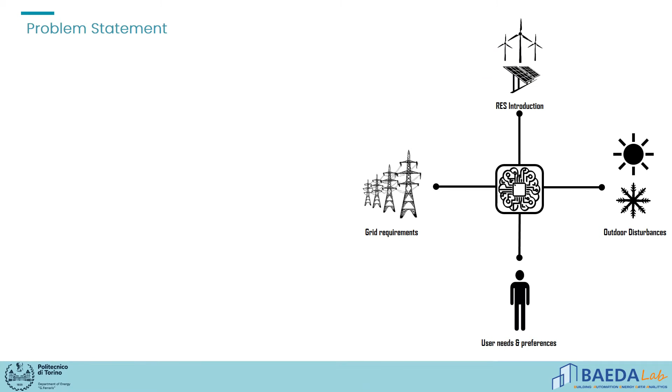Nowadays, buildings are becoming more and more complex due to the increased penetration of multi-source HVAC systems and the increase of distributed renewable sources and storage. This increases the energy flexibility, but at the same time requires innovative solutions for the optimal management of energy systems in buildings. Energy flexibility represents a fundamental characteristic of a smart building and defines its ability to adapt and respond to grid requirements, climatic conditions, and user needs.

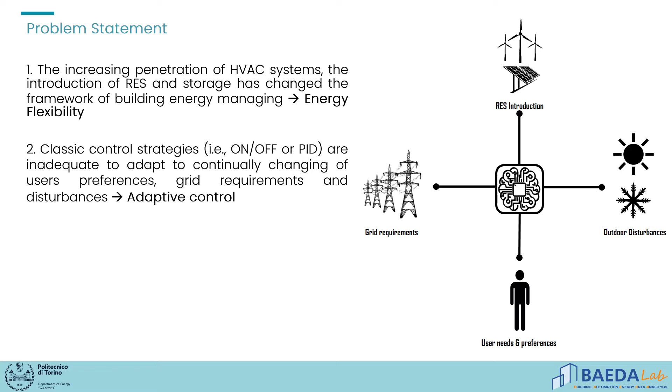Classic control strategies such as on-off and PID are mainly reactive and unable to predict changes in weather or building conditions, and their implementation results in suboptimal control policies. To overcome such limitation, the application of adaptive control strategies has been explored in the last few years. In particular, model-based control strategies, such as model predictive control, were explored to overcome such limitation, showing excellent ability in improving comfort conditions and energy efficiency in buildings. However, a significant problem in model predictive control is related to the performance dependency on the model definition for the control strategies optimization, which is often challenging to design with good accuracy.

As a result, the interest in model-free control strategies has increased since it does not require prior knowledge of the process or environment to be controlled.

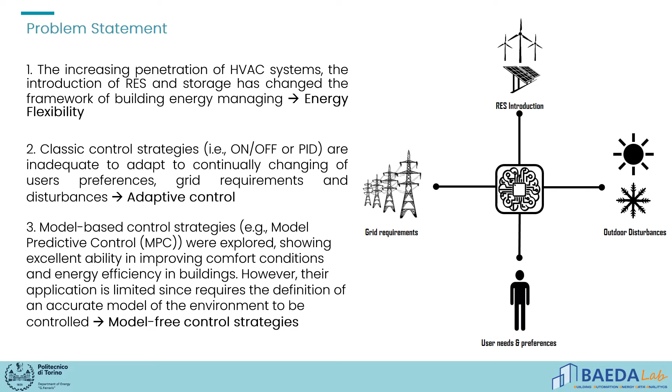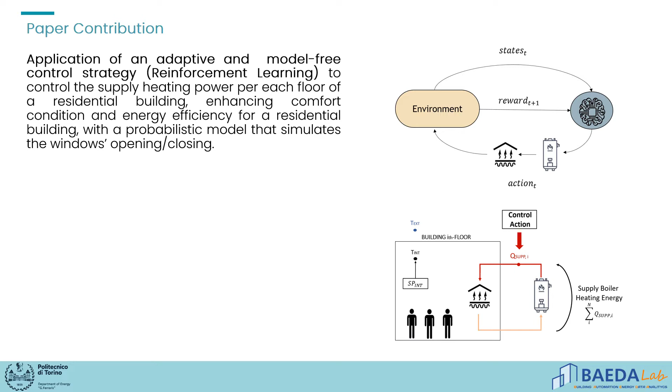Therefore, in this paper, an adaptive and model-free strategy based on deep reinforcement learning was designed to manage the supply heating power per each floor of a residential building for enhancing energy efficiency and indoor temperature conditions. The occupant building interaction was considered as part of the control problem using a probabilistic model which simulates the opening and closing of windows. Firstly, a sensitivity analysis is carried out on the hyperparameters of the model to assess their impact on the performance achieved by the control agent during the training phase.

Then, the best configuration is adopted for testing the adaptive skills of the controller by changing some forcing variables, consisting of 4 different control scenarios.

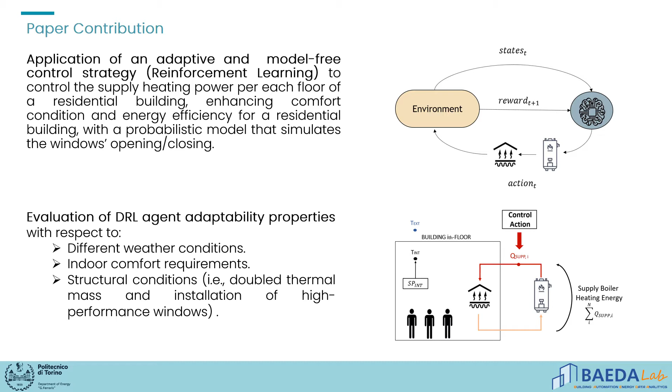Reinforcement learning is an area of machine learning, often using control theory, in which an agent learns an optimal control policy that maximizes an objective function through a trial and error interaction with the environment. The controller, called agent, is connected to an energy system and selects a particular action to maximize or minimize an objective function named the reward function. After performing some action, the environment provides the agent the corresponding reward and information about the new states, for example outdoor or indoor temperature. Then the agent analyzes the new information and provides new actions.

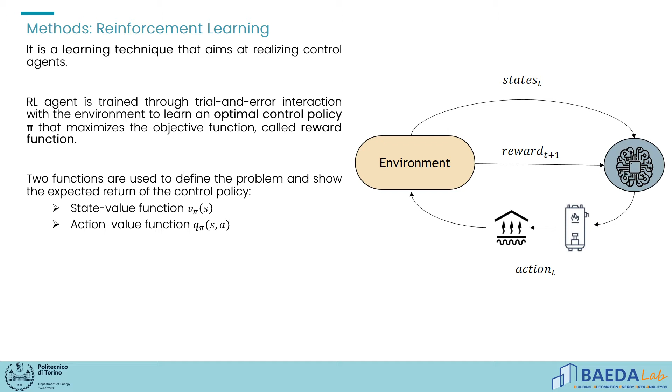Mathematically speaking, the problem can be defined by 2 functions, namely the state value and the action value function, that are used to quantify the goodness of a policy. The combination between deep neural network and reinforcement learning algorithm seems to overcome computational problems related to complex state space representation, leading to what is called deep reinforcement learning.

In particular, in this paper, it was implemented the soft actor critic, an off-policy algorithm capable of handling continuous action space. This method adopts an actor-critic architecture that employs 2 different deep neural networks, the actor and the critic, that approximate respectively the state value and action value function. Moreover, entropy regularization represents a key feature in soft actor critic, ensuring that the agent is pushed towards the exploration of new policy, while avoiding that it gets stuck in suboptimal behavior.

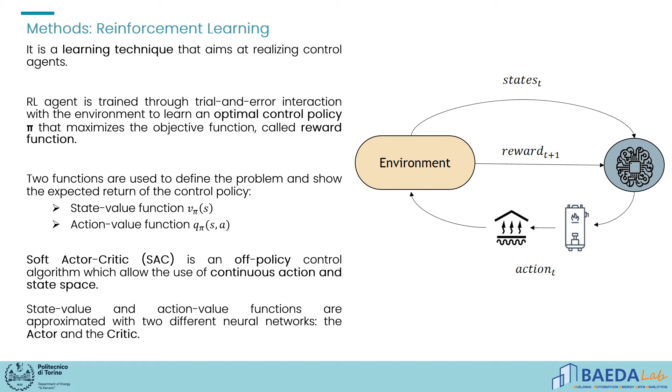The proposed control strategy was developed for a 5-story residential building located in Turin. The building is organized into 5 different thermal zones, 1 per each floor. The thermal zones are served by a radiant floor heating system equipped with a natural gas-fired boiler and variable speed circulation pump.

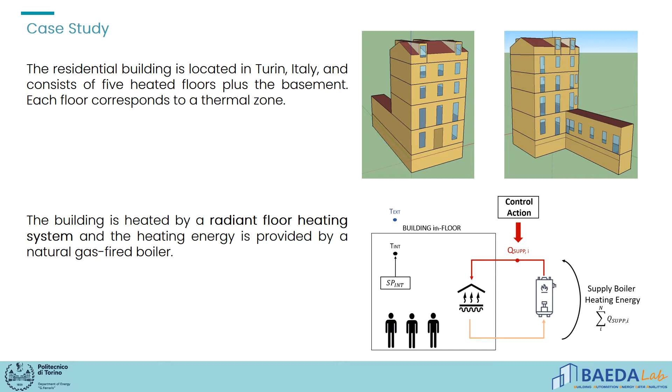4 different probabilistic models that simulate the occupant interaction with the building concerning the window opening or closing were implemented and tested within the simulation environment. These models are based on logistic regression and propose 2 equations to predict respectively the window opening or closing.

After a qualitative analysis, the model proposed by Anderson was implemented in this case study, and this model employs indoor temperature, relative humidity, and carbon dioxide concentration, along with outdoor air temperature, wind speed, and solar radiation, to estimate the probability of opening and closing of windows in the building, and the coefficient of logistic regression depends on the day of the week and the time of the day.

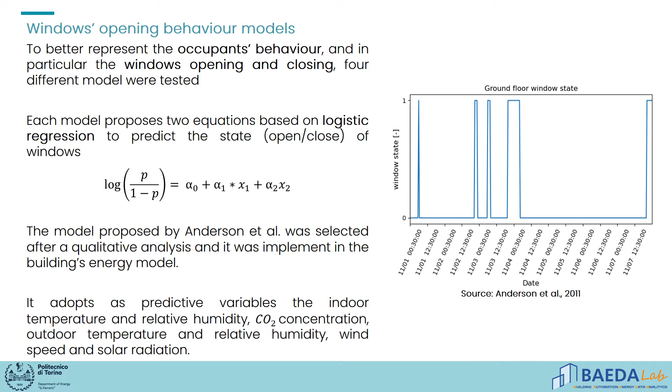Here is presented the methodological framework with the aim of introducing each stage of deep reinforcement learning controller development. The interaction between the controller and building energy model was simulated through building control virtual testbed, allowing information exchange between the building model developed in EnergyPlus and the reinforcement learning controller developed in Python.

The first stage of the framework was aimed at defining the main components of the reinforcement learning control problem. The action space includes all the possible control actions that can be taken by the controller. The reward is a function which describes the performance of the control agent with respect to the control objective. Finally, the state space is a set of variables related to the controlled environment which are fed to the agent in order to learn the optimal control policy which maximizes the reward function.

In the second stage of the process, the deep reinforcement learning agent was trained. Reinforcement learning agents are characterized by many hyperparameters which require appropriate tuning. Therefore, in this stage, a sensitivity analysis was carried out on some of the most important hyperparameters by training the agent with different configurations, in order to analyze the variation in the results obtained and identify the best solution with respect to the metric adopted.

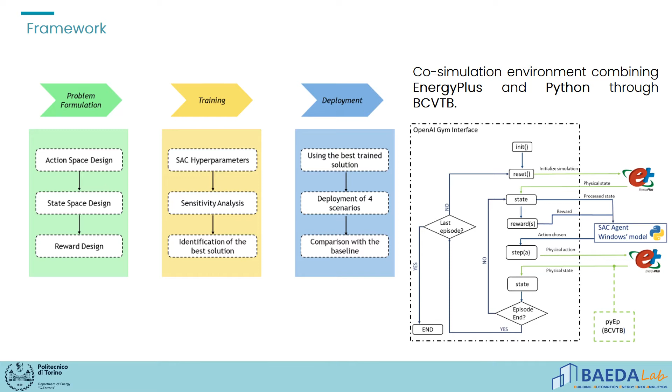In conclusion, the best trained agent was tested during the deployment phase in one episode which includes a different period from the training episode. Moreover, the deployment was performed in different scenarios, including different indoor temperature requirements and building envelope properties from the training stage, comparing the performance of baseline and reinforcement learning-based agents.

The performance of the deep reinforcement learning controller was evaluated against a baseline controller consisting of a combination of rule-based and climatic-based logics for the control of the supply heating power. The rule-based controller managed the operation of the radiant heating system according to the indoor temperature values and the occupancy schedule, separately per each floor.

The heating energy to each floor is applied 2 hours before the arrival of the occupants, or when the indoor temperature is lower than the lower threshold of the stability range during the occupancy period. Contrarily, during the unoccupied hours, or when the indoor temperature is higher than the upper threshold of the stability range during the occupancy period, the heating energy is not supplied.

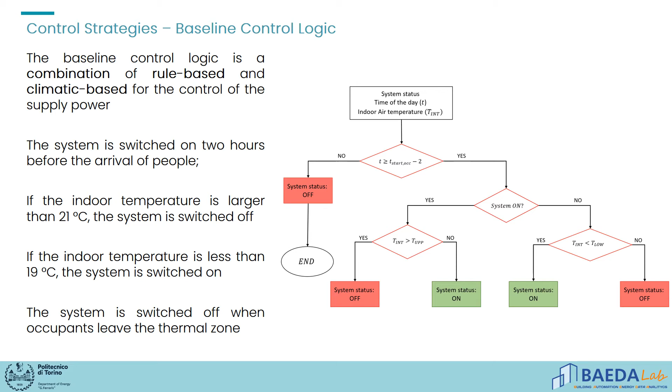The controller is to maintain the indoor temperature into an acceptability range defined between -1 and 1 from the desired temperature value of 20 Celsius degrees, while reducing the heating energy provided to the building through the regulation of the heating power supply to each radiant floor.

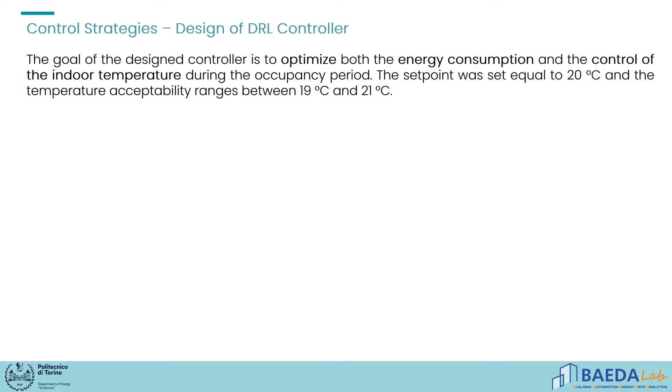Since soft actor critic was selected as the control algorithm, the action space was expressed as a continuous space of 5 different actions related to the supply power per each thermal zone, defined between 0 and the effective nominal value and expressed in kilowatt. The state space is composed of 26 observed variables.

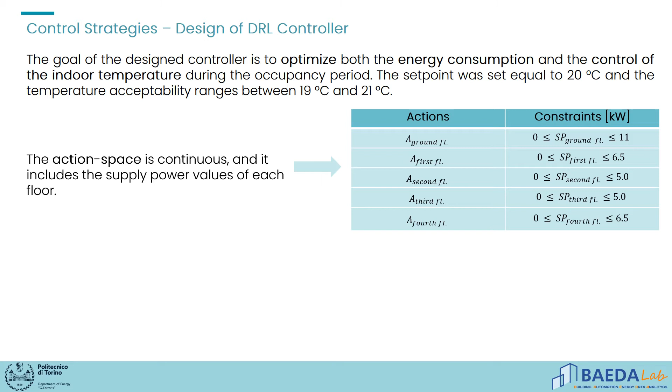The variables chosen are feasible to be collected in a real-world implementation and provide the necessary information required by the agent to predict the immediate future rewards.

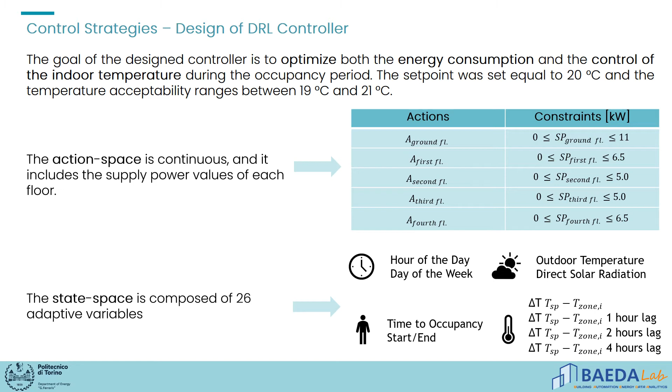The reward function was formulated as a linear combination of two different parts, an energy-related and a temperature-related term. They were combined and employed two weights, delta and beta respectively, that were made to vary in order to change their importance. The energy term refers to the heating energy consumption calculated in kilowatt-hour and tries to minimize this value.

The temperature term was evaluated as the temperature difference between the upper or the lower threshold temperature of the stability range and the indoor air temperature, with the aim to maintain the desired indoor temperature conditions.

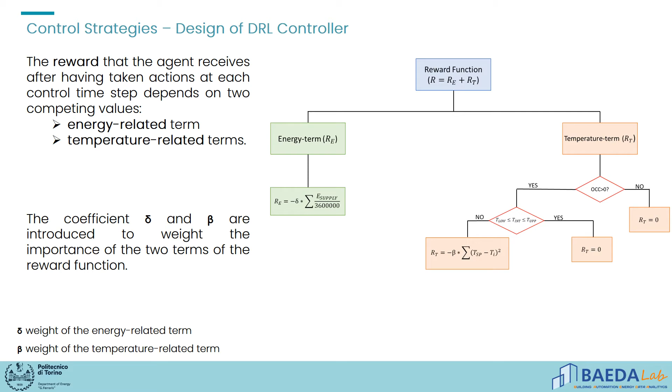The reinforcement learning framework is characterized by a number of hyperparameters that strongly affect the behavior of the control agent. In order to analyze their impact on the performance of the controller, different configurations of the most interesting hyperparameters were tested and compared in this study.

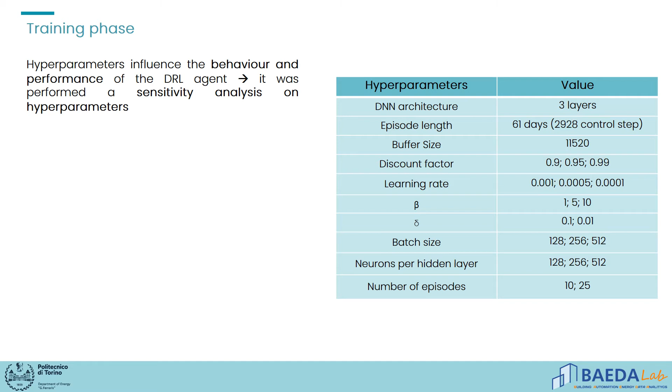To assess the goodness of the deep reinforcement learning controller configurations, suitable key performance indicators were introduced. In detail, two metrics were selected during the 2-month period of operation and summed up at the end of each training episode: the energy saving, considering the amount of energy supplied to each zone with respect to the baseline, and the cumulative sum of temperature violation during the occupancy hours.

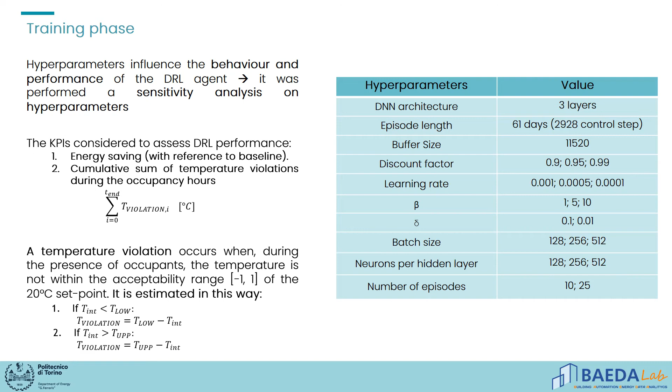A temperature violation occurred when, during the occupancy period, the temperature was not within the acceptability range of -1 to 1 from the 20 Celsius degree set point. It was calculated as the absolute difference between the indoor temperature value and the lower or upper limit of the acceptability range, when the internal temperature was lower or higher than these limits. Moreover, these metrics were also calculated for the baseline to compare its performance with the deep reinforcement learning agent.

The best configuration of hyperparameters retrieved from the sensitivity analysis performed during the training phase was chosen for testing the adaptability of the agent in 4 different scenarios during a simulation period that includes January and February.

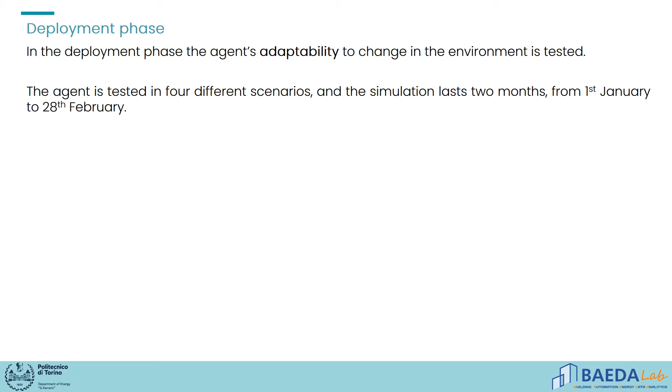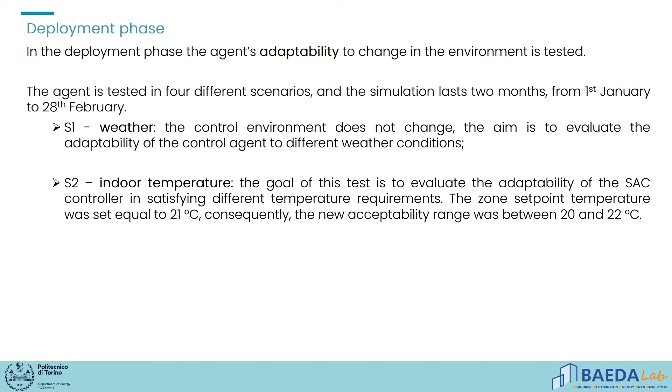The scenarios considered include variation of outdoor conditions, changing the simulation period with respect to the training phase, increasing the temperature set point, changing the indoor temperature requirements and the acceptability range, and variation of building features - window thermal transmittance, solar gain coefficient, and internal mass - improving the performance of the transparent building envelope and the thermal inertia of the building.

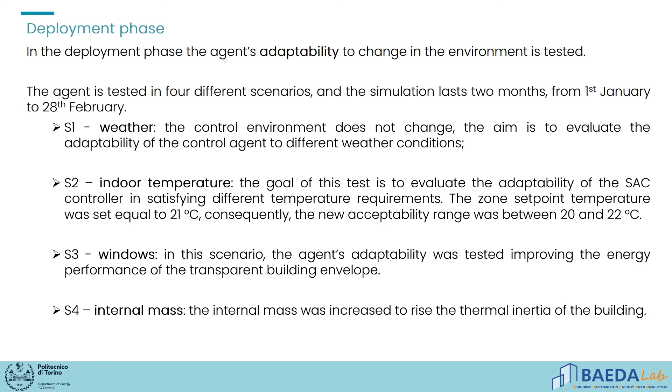The results of the analysis are presented at 3 different levels, starting from the training phase up to deployment phase results. The results obtained for 15 agent configurations were compared in the sensitivity analysis performed during the training phase in the last episode.

In particular, we compared the performance of a rule-based controller and different configurations of deep reinforcement learning controller, showing in a 4-quadrant visualization the cumulative sum of temperature violations during the occupancy period, in logarithmic scale for clarity, as a function of the heating energy saving with respect to the baseline.

The black dashed lines indicate the performance achieved by the baseline controller. The right bottom quadrant includes all the solutions that performed better than the baseline both in terms of temperature control and energy consumption, and the worst solutions, corresponding to higher energy consumption and temperature violation than the baseline, should be displayed in the left top quadrant.

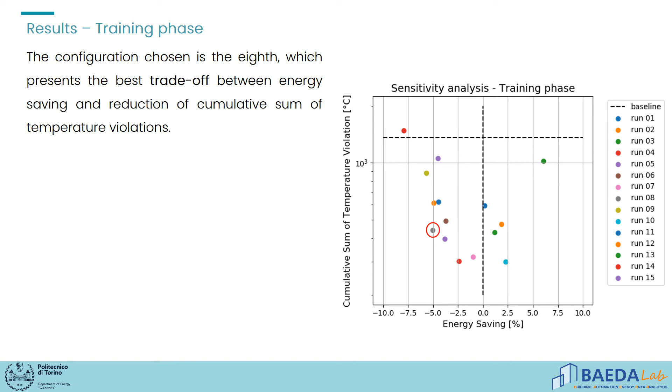At the end of the sensitivity analysis, results show that configuration 8, whose hyperparameters are specified in the table, guarantees the best trade-off between energy savings around -5% and temperature violation around -65%.

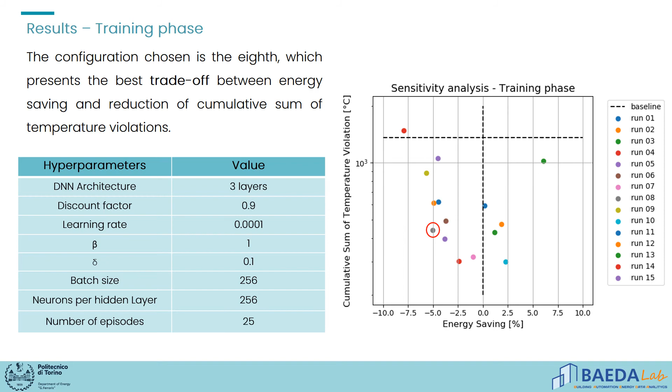The adaptability of the selected controller was tested in the 4 deployment scenarios, comparing the results obtained in terms of energy savings and reduction of cumulative sum of temperature violation with respect to the baseline.

In all scenarios, the deep reinforcement learning controller leads to a reduction of heating energy supplied and temperature violations. In particular, the developed controller achieves the highest energy savings, around 5%, in the 4th scenario, without reducing the temperature violation with respect to the baseline.

In contrast, in the 3rd scenario, the deep reinforcement learning controller shows the highest reduction of temperature violation, around 60%, with the lowest energy savings with respect to the baseline, around 2%.

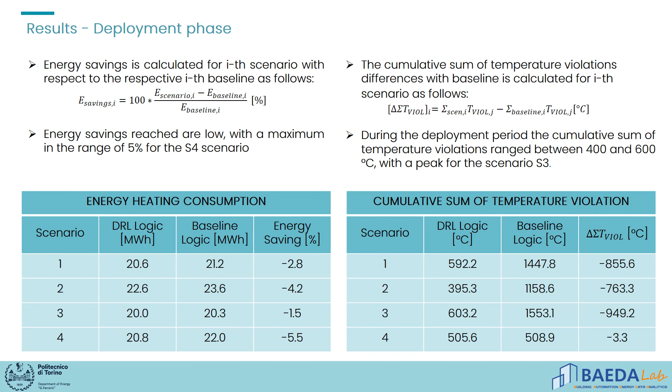A detailed comparison of the temperature trends observed for the rule-based and reinforcement learning controller during the 1st scenario provides further insight. In particular, the figures show the indoor temperature and supply power patterns for the ground floor.

The adaptive controller is capable of reducing the temperature violation and energy supply through optimal management of the heating system. The developed controller optimizes the preheating phase since it switches on the heating system later than the baseline, reducing the corresponding energy supplied and ensuring that indoor comfort requirements are met.

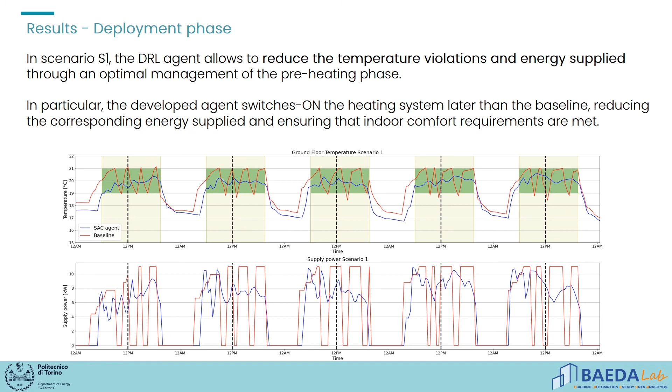In conclusion, the present paper clearly shows the possible improvement given by the introduction in residential buildings of adaptive and model-free control strategies for enhancing energy efficiency and comfort in buildings.

Furthermore, the agent was found flexible and effective in adapting to modifications in the controlled system, such as weather conditions, indoor temperature requirements, and building envelope characteristics.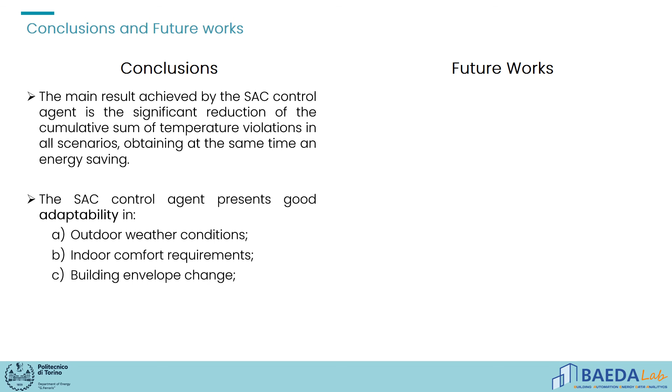And now, what remains to be done? In the near future, we will focus on the comparison between the developed soft actor-critic controller and a model-based solution, such as model predictive control.

A robust comparison between these 2 techniques in terms of control performance, computational cost, and modeling effort could provide useful insights on the strengths and weaknesses of deep reinforcement learning controllers.

Moreover, the evaluation of indoor thermal comfort could be performed by introducing parameters such as predicted percentage of dissatisfied and predicted mean vote in the reward function.

Even if the monitoring of many comfort parameters is a non-trivial task in real-world applications, in a simulative context, the evaluation of thermal comfort performance achieved by deep reinforcement learning agents could be explored.